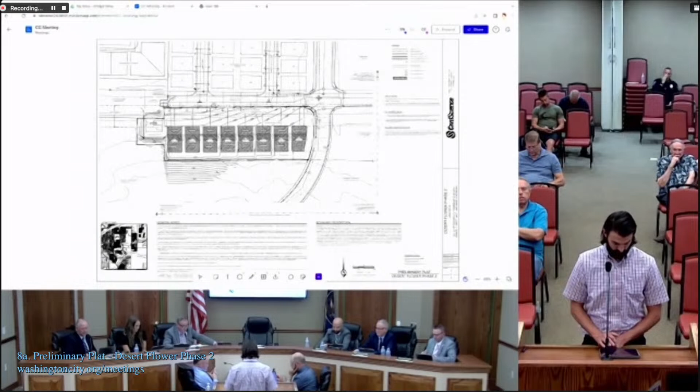Thank you, Mr. Ed. And we also, I know most all of us actually watched the Planning Commission meeting, and I actually do have some questions. I took some notes. I didn't know I was going to be Mayor Pro Tem when I took these notes, or I would have done a better job.

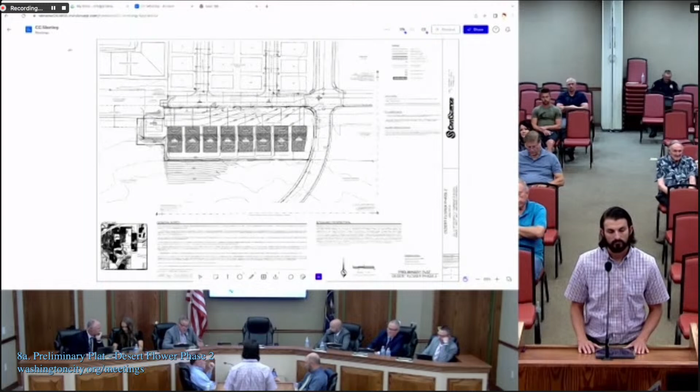There was a 14th condition added, and the reason that was added is because of a debris basin that was created. That dirt was placed in an area where it's felt that, like by some of the property owners there in Horizon West, it has created back seepage into their property. I understand there was some dirt there before, but not the amount that's there now.

I know that there was some conversation about the berm from the top of the road going down. I guess what I would like from staff is maybe more of an explanation about that, and whether condition number 14 is going to address this problem and concern of the adjoining property owners. That would be my question.

I'll take a stab at it. Drew, feel free to jump in anytime, but we did go out and walk the site. Looking left, or starting on the west side, if you count 5 residential units in, all of that terrain seemed to be natural vegetation that has been there for many years. We didn't feel that would have come from previous development or recent dirt movement. There has been a berm placed there from the excavation of that detention basin to help divert water runoff from coming into that residential area, and it could be fine-tuned a little better on the west end. But it is there, and an effort has been made.

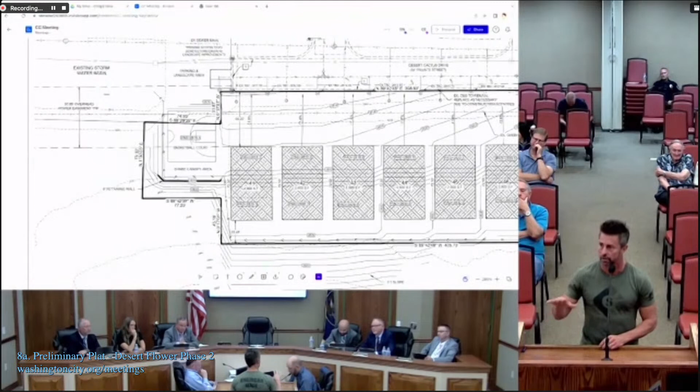So if it was one of your barbecue stands there with, maybe a fake turf area, like what we have spotted throughout the neighborhood. Maybe that's a good use.

Be good with that. Yeah, is there a basketball amenity in your development there? Over in the middle, kind of up on Bella Vista Drive? I was thinking there was, and we did sport court it, so it's a really nice basketball court. So if someone wants to play standard basketball in that development, then there's a place.

So, Mayor Pro Tem, I think this is a good solution. I think it works for James. I think it works for the people in Horizon West. I'm not opposed to kids walking a couple blocks, they have access to the other basketball court. That's not going to hurt them, a little bit of exercise. So I think it's a good solution. I mean, I could fall asleep to kids playing basketball, but I do understand their concerns, and I'm supportive of changing that too.

Well, we appreciate your willingness to work with the good folks in Horizon West. Those are great people there that bring a lot to our community, and we appreciate you working with them. And where this is preliminary plat, we're looking forward at a final plat that everything's wonderful and moving along well. But council, I guess I would turn to you. Thank you, James, you may sit down. I think I would turn to you for a motion, maybe considering some of those things we talked about as being a condition, unless you'd like further discussion.

I have one other item I just want to touch base on. It has to do with the grading on that southwest corner, it goes up kind of high. That's why I asked if it was in the hillside. It sounds like it's less, but if you look at the elevations, it's quite high on that one corner. It's going to be 20 feet above the house, and we're going to see that scar. What's the mitigation they plan to do on that hillside if they do get that scar?

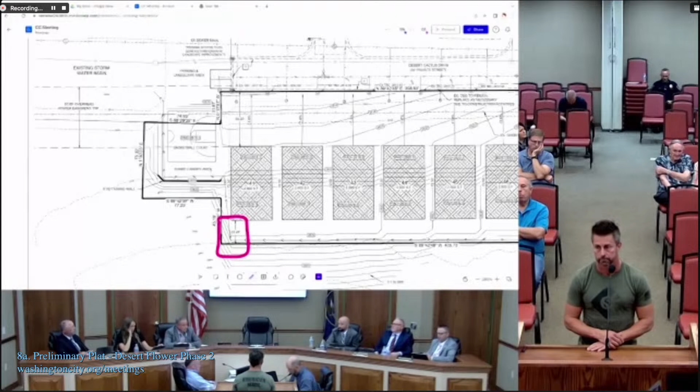I'm just concerned, I looked at the bottom grade. What was that elevation, Drew? It's about 28, 12 to 30 feet. You're at pad, I'll just call it 18, and then the upper, because they're walk-ups, the back is 28, so you go up 10 feet, and then you get clear up to the top scar, and you're at 54. So if you're 28 plus 10, you're 38 feet, and you got another 10 to 12 feet above that house that you're gonna see that scar.

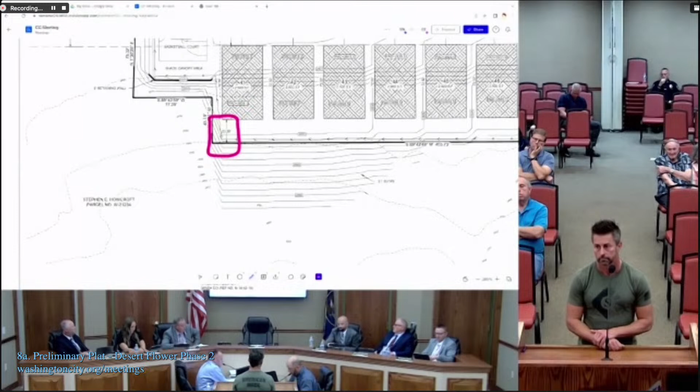If it was hidden by the house, I wouldn't be as concerned, and these will be 2-story houses. Okay, but the 2-story starts, it's 1 story from the back. Right, and so you're still gonna see 10 feet of scar. So I just get concerned that we're gonna scar up that hill and not have a good mitigation.

Probably the right way to do that would be to add a little retaining wall, and that would take away that need. I'd be comfortable if we had a little retaining to keep the scar of the hill lower than the house roofs. Does that make sense? Just so that those scars aren't climbing up the hill?

Yeah, that makes sense. It does, and I appreciate you commenting on that, because we do have some hillside in this development, but that one is not one that we've identified. Yeah, we appreciate that. We will do what we need to do as far as retaining.

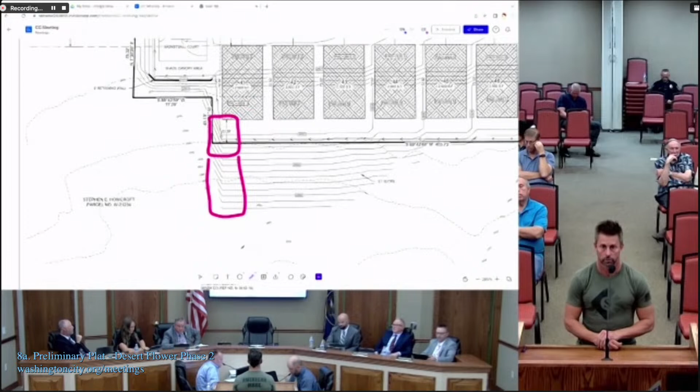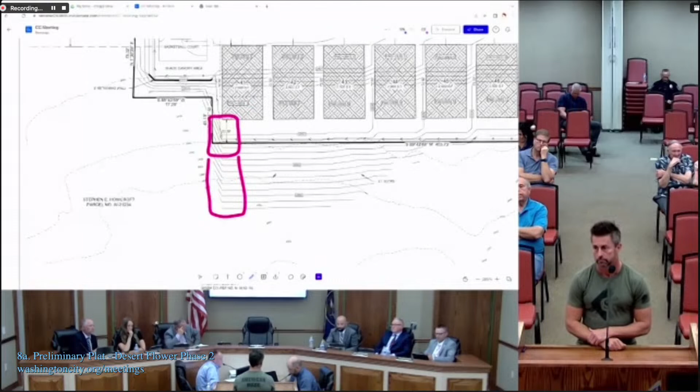So keep it, you're saying, so the scar doesn't come above the roof line of the house? The roof line of the house. Okay, so it's a 3-to-1, if we add a little — I'm not saying build a straight wall, but maybe there's a nice looking wall, some eyebrow walls and some decorative elements to help keep that. But that would be a condition: the scar can't be higher than the roof line of the house.

So council, what I've heard is a couple of items that maybe need to be considered in your motion. One is, Councilman Henderson, you talked about riprap, and then what was just discussed regarding a small retaining wall, and then keeping that scar line below the roof line of the house so that the surrounding neighbors and area can't see the scar. Was there anything else that you can think of?

The amenity — the barbecue amenity being changed from basketball to, and you can specify if you have more questions, we can take some time to discuss that, but a gathering area with benches and a barbecue. I don't believe that they're thinking of grass there, it'd be actually turf, an artificial turf.

Okay, I think we've got to be pretty specific without a plan. I do too. I would like James to agree to whatever he plans on doing so that we're clear, because we could say a barbecue and then... you're wondering what brand of barbecue? No, I'm not going to get into the brand of barbecue.

How many hamburgers it can throw up — like the ones we do in the park, not just something on a sidewalk. It'll probably be close to the stand we did over at our other park, where it matches the Washington City barbecue areas where you can put your briquettes in, and it's a steel structure. And then really just fake turf. If we could have the 2 parking stalls right there and then put the barbecue area...

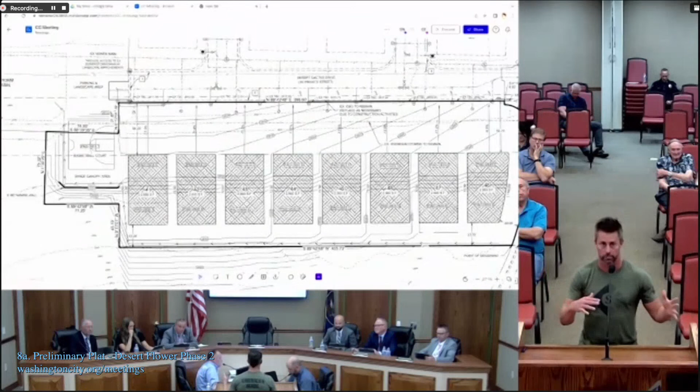...that way people that are going to use that — I don't know if they'll drive to it or not in this neighborhood — maybe they park there and they're able to use that. Or how would you like to see that, Craig? Don't just ask me, but my thoughts are a smaller pavilion for some shade and a couple of benches, big enough to have a picnic table at least. I'm not saying it has to be massive, but something that people can utilize, not just a sidewalk.

I think that would be really nice, a nice pavilion's a good idea. I'm not saying like the big 40 by 40s, but just a smaller pavilion. Well, 10 by 20 — it needs to be somewhat big, I think, but that's what I'm feeling comfortable with. 10 by 20, big enough to fit a picnic table.

What if it was just a square one? Maybe, I think we did a 12 by 12 in one of our areas, and it worked pretty good to get a picnic table under. I don't think this is going to have 50-person gatherings, but it might have 2 families there. And I'd say a 12 by 12 for 2 families is not big enough. I mean, our standard minimum one's 40 by 40.

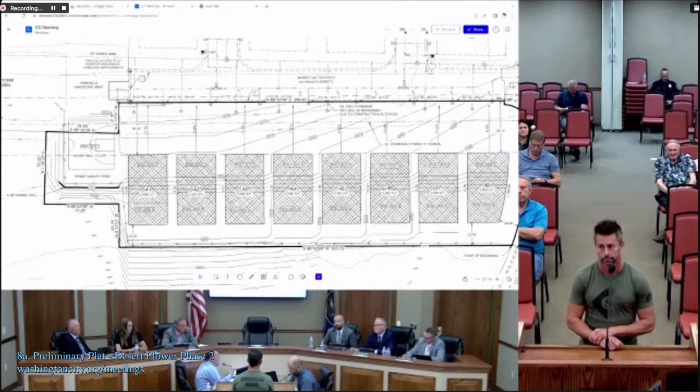Those are in parks, I wouldn't mind — I'm not saying that. 12 by 12s, if you want to do 2 12 by 12s. I would rather just do a single one, just a single, 10 by 20. But 144 square feet, that's not much bigger than a small bedroom when it comes down to it, right?

My kids are spoiled, maybe gone. So what I'm hearing, the consensus is like a 10 by 20, is that what you're thinking? So that's 200 square feet. We just do something that'll hold 2 picnic tables, and then your terrain will dictate the size.

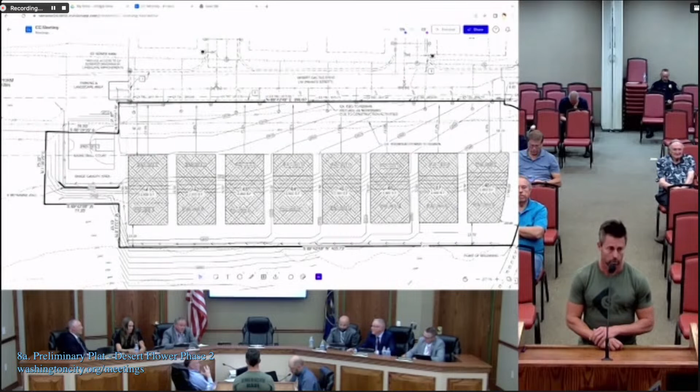I think a square one would work better in this area, so we can come up with that - 2 picnic tables and a barbecue pit on the end where they can use it. Is that okay with you, Drew? So James, if you get a plan and submit that to Drew, that'd probably work the best. Sketch it out, show us what you're thinking, and let Drew sign off on it before you start. That might be the best way to proceed, if that's okay. Thank you, appreciate it.

I'm ready for a motion if council is done with discussion. I move that we approve a preliminary plat for Desert Flower Phase 2, located at approximately Desert Cactus Drive and Bella Vista Drive, with the conditions outlined by staff, including number 14. We also want to add that the scar on the hillside should not be visible above the rooftops or roof line, and that we substitute a barbecue area with 2 tables in place of the basketball court. And just in case everyone heard, I requested James to do a sketch of that and give it to Drew, to make sure we're on the same page.

Perfect, okay, a motion, do we have a second? I'll second that. Second by Councilman Martinson. This is a preliminary plat, so we're going to do a roll call vote, starting with Councilwoman Casperson. Aye. Councilman Coates. Aye. Councilman Henderson. Aye. And Councilman Martinson. Aye. The motion carries unanimously. Thank you.

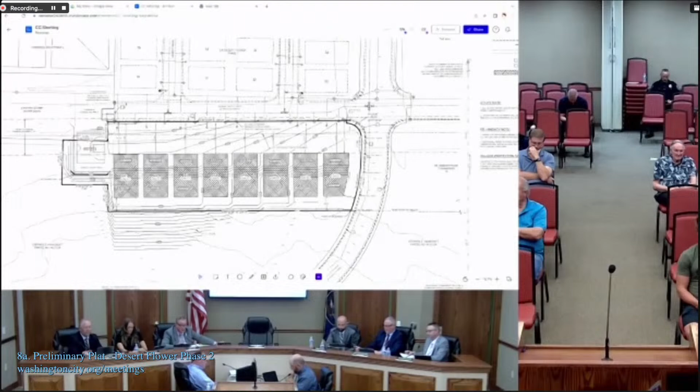Now go and make us proud. Thank you, appreciate you.

Okay, the next item is item number 9, a conditional use permit. It's a continuation of consideration to approve conditional use permit C-23-01 for a proposed car wash, located at 834 West Buena Vista Boulevard. The applicant is Lone Star Builders and Eldon Gibb.

Is this, would you come up and explain? We just want a brief update. I understand this is being tabled, but maybe give us an update as to when we can expect this and why we're tabled, and keep us updated on it.

Thank you, Council. On April 26th, City Council tabled this item to today's meeting. We've met with the applicant, and they're not quite ready to move forward. In my report, I asked to table it to the 24th so we can get with Public Works Department and work through a couple concerns. I would ask that we not put a date on it, in case we're not ready to go on the 24th, so we can bring it forth when we're ready.

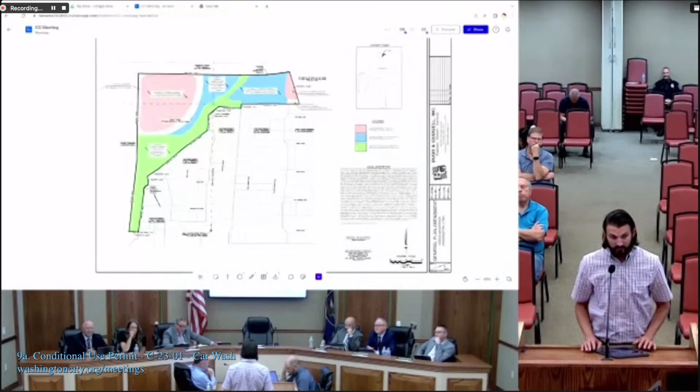Don't we want to put it on a date though? Typically we've done that because we don't want things going on and on. I remember the last one we did, we just said within 2 months - if it's not within 2 months, they need to start over. I like that. Well, we're kind of tied with the public hearing process. Unfortunately, when you don't have the public hearings, you can let them go with whatever. This one being a public hearing, I think we do need to set a date, because if new stuff's brought up, you need to open up your public hearing and let comment on the new items. So I do think we need to set a date.

Sorry, I don't think it's a big deal to set a date, and if we need to push it again, push it again. We got to give them adequate time to do some of the changes we requested. We asked them to look at maybe changing the flow of the car wash and the entrance and exit.

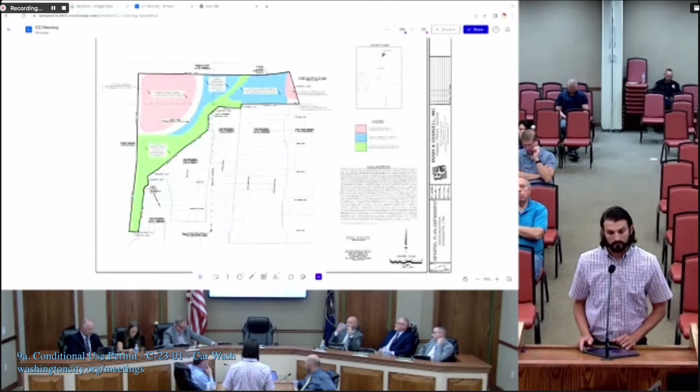So Council, if you're okay with it, we could maybe table that to the 24th. Is that okay? Mayor Pro Tem, I'll make a motion. We table item C-23-01 to the May 24th meeting. Thank you. Second? Second. All in favor? Aye. Thank you.

Number 10 is an ordinance, a consideration to approve an ordinance for general plan amendment G-23-03, to change from administrative professional AP, open space OS, and R-1-6 to a planned unit development PUD, located at approximately 250 East Washington Parkway. The applicant is Greg Whitehead, and our Community Development Director, Drew Elliman, will be presenting on this item. Thank you, Mayor Pro Tem.

I just want to clarify the heading on that was a little wrong. They put the zoning, what the zoning is. It's not - the actual heading should be from civic and open space to planned unit development and open space. I just want to clarify that on the record. Thank you, not your fault. It's just a misprint from the original agenda item in Planning Commission.

The applicant is seeking to amend the general plan land use map in this area specified on Washington Parkway. The requested area covers approximately 18.72 acres. The current land use designations are civic and open space. The applicant is seeking approval to have the land use designations changed to planned unit development and open space for those general plan designations. This would be for future professional office and commercial uses.

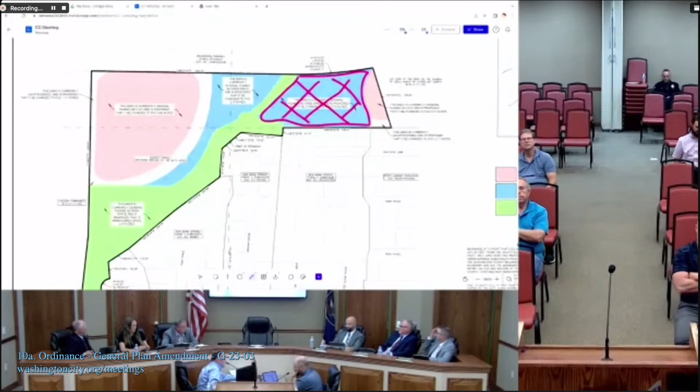There's more to it of how these lines got established, and I can't see that right now. So I would like to see the whole thing just as PUD, with a percentage of open space, I don't know the best way to do that either, but it's because we want to preserve the corridor. I don't know how that corridor got drawn that way. There's no legal boundary or description that says this line, it's just a line someone drew. I'm sure there's more to it, and I'm sure Bob can get into that, but I don't know.

It feels tight to me, but if we just identified it as a PUD, and look at it at the next phase, at approval, and decide at that point what's open space, what's not, what's being preserved. I just don't like setting the lines, because what's a general plan? Bubbles, right? They could draw, hey, we're going to have open space, blue, and not. So that's just my thought.

Yeah, just to clarify, in essence what they're doing is using those, and probably not the best utilization. So what they're asking to go PUD is everything I've hashed in here, and the green is to remain open space. If that helps simplify, you probably already knew it, but it's put out here on the screen. That's exactly what this is, everything in this hashed area.

Well, I need to bring this over here because they still own that too, so to include that, but that's what the request is right there. That area to go PUD, the green that's showing is to remain open space. And just for the drainage, it'll actually help having all this done with what W.W. Clyde's going to do across the street on the north side. This would help clean up a lot of the drainage in that area.

So I think everybody up here understands the open space is basically a placeholder. And like when I go to sell properties to people, they always ask, oh, do you think something's going to be developed there? And we always say never, you know, just like you're saying, Drew. But I think to the general public, when they see the word open space, they think preserved space, that it's going to be preserved and not developed.

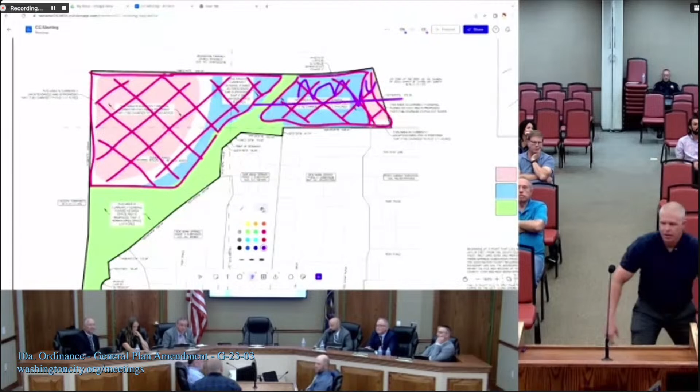Please. Bob Hermanson again with Bush and Gudgell. Thanks for your time. We're happy to work through either scenario. The intent, as Craig mentioned, is to get to the point where we can work through the site plan to justify whatever design comes about, leave what space is not buildable and what is, and do the armoring and protection for the wash. So the intent is just to get to the point where we can work through it, to then specifically designate what's buildable and what's not, and leave those things out.

And so this rendition was just working with staff with the thought to leave this part out. It's definitely a better option for us to just bring the whole thing in, and it gives us all more flexibility to say where it goes. So if that's the motion, we'd be happy to do that as well. We're just looking to graduate to the next level so that we can present something and get into details, instead of just wiping it off like it doesn't have any value at all. So that's all, if there's any other questions for me.

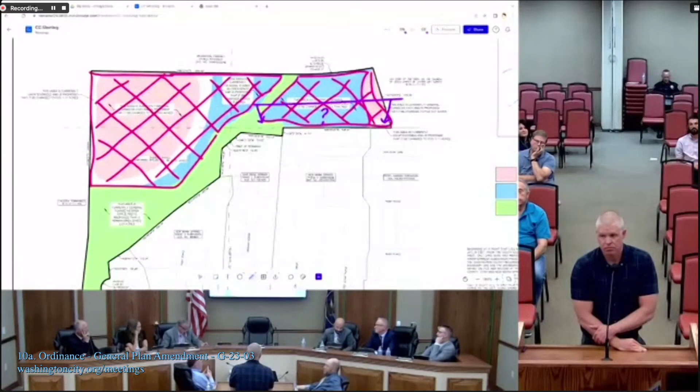So the only concern that I have - I mean, I presented the idea, but also recognize that the way we deal with our PUDs is based on the acreage of the general plan density. So I think we need to identify what it is that we're dealing with in this same motion, that we're not just saying, because it looks like the whole south area is going to be open space, I wouldn't say we'd include that area, because that area is 6.07.

I'm saying it's probably a little less if you took the line just across the bottom straight. I don't know, it's just an idea. I feel like we've got all these things going on, but really it's a PUD. We should let them be creative and create a good plan that works for everybody, leaving buffers between existing residents and the wash, and not be stuck to these lines. Or maybe we just go with what's shown today, saying these acreages don't mean anything really, it's just a PUD with open space and PUD space, but not identify exact acreages at this time. What's your thoughts on that, Drew?

No, I appreciate it. Most of the densities are tied to residential PUDs. I don't know if we have density in commercial, I can't remember off the top of my head, so I'm not as concerned, but it does help to keep in mind how much they're going to put on here.

I'm still glad you said it, for Bob to write in his notepad, be protective of that. But I do appreciate that, I like what Bob said, let them bring something, and it sounds like you're more amiable. If you bring something and they're not willing, you'd go back to the drawing board instead of getting mad. Because at least the discussion's open at this point, and that's what I appreciate about them and the applicant themselves. I think they're going to be more open, if they don't get it the first time, they'll bring you back something and keep working with you to get the best project for everybody involved, the city, the residents, and themselves.

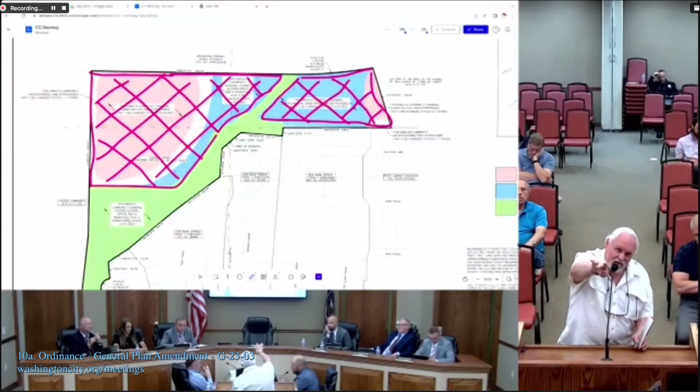Well I appreciate that, and I guess I would point to Councilman Henderson, and I appreciate your point on this. You're in an area when you talk about open space, there's also, and I've heard the placeholder, and I've heard the taking of property. But from my experience, from the legal end of things, the taking of property has to be pretty severe, almost arbitrary, trying to take property that's not developable. In this, if you're looking at the grades by the map, it's a 40-degree grade going down into the wash, and it's just not an area. Any area can be developable, but if you're going to flatten everything or raise it up 20, 25 feet to do that - I mean this is the perfect area that should be open space.

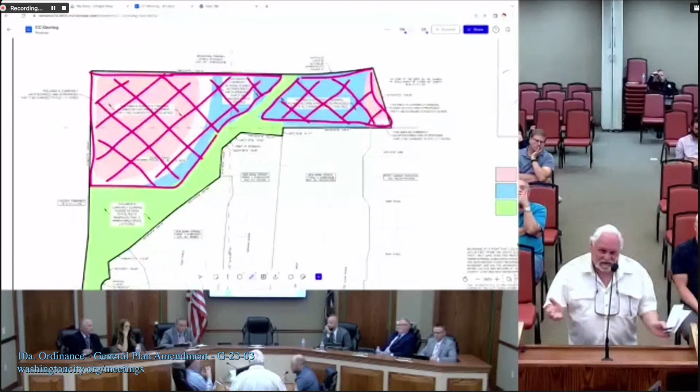Based on the definitions, I think there's also, and I appreciate Councilman Casperson mentioning it, a reasonable, justified reliance by the homeowner. I have legal training, but as a homeowner also, when you look at the open space, I did my homework and read the statutes, this fits every single one of them to the T. There's 4 principles that have to be met to make the amendment. I didn't bring those to make an amendment because I didn't anticipate speaking. But all 4 of those are contrary to what is being done here when it comes to the open space.

I appreciate the PUD aspect also, but that's kind of putting the cart before the horse. My fear is we'll defer to the experts again when it comes to development, because you could try to develop anything. That's a perfect example of open space, 2.7 acres, and some on the other side, but I won't get into the details. I don't object to the other parts of it. I think that can be consistent, it makes perfect sense because it's already zoned. But that has been open space since before 2010, and there's valid legal standing legislated locally by your ordinances and also by the state of Utah. It meets requirements, and by your general plan. So I appreciate it, thank you sir.

Council, anything additional? I'll turn to you for a motion then.

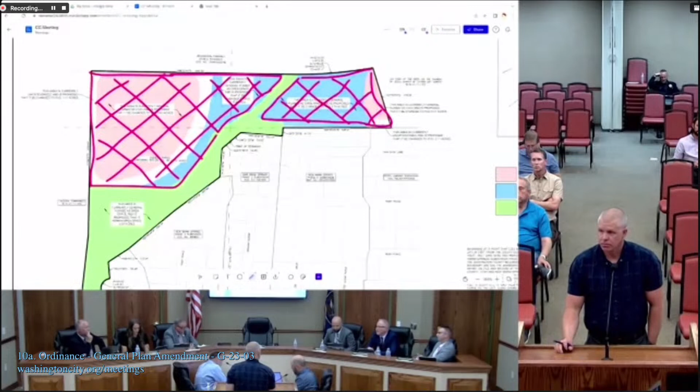And so you've heard the planning commission talk about buffer zone between those residents, and if we were to approve this today, that's what I would expect as well. Yeah, those guidelines that we've been talking about in this meeting and the previous meeting would all be incorporated into this design from those comments.

Thank you. Mayor Pro Tem, I'm ready to make a motion just to see where it lands. I'd like to make a motion that we approve consideration to approve the general plan amendment for G-23-03 with the modifications that the parcels.

How do I explain this? I want to leave everything south of the green line, of the main green line. Drew, can you draw a line for me? Where do you want your line? Can you clear this out and put it in the record of what I'm saying? I'm serious about putting it in the record.

Take a snapshot, put it in the record so we're clear on this map. It's Control Alt Print, print screen, put it on a Word document. It's not that hard. Well, I'm gonna put roughly a measurement. We'll try to get to that. Just tell me where to clear this drawing. Clear what you got here. If I can grab right on the middle of those cross pieces, just pull better.